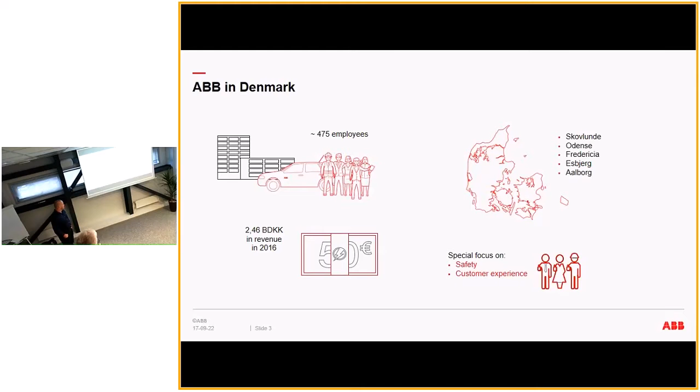We're a little bit less than 500 employees in Denmark. We're located in 5 offices. Aalborg is one up here, where Morten is from. Then Skovlunde is in the Copenhagen area, and then it's more or less on a line from east to west. We have an office here in Odense, one in Fredericia, and one in Esbjerg. Esbjerg takes care of all the offshore activities in the North Sea from oil and gas. We have a very high focus on safety and customer experience.

We work in different areas. So we have the product, which is most of what we do. We do systems. And then we have service and software. This one is almost 60%, and this one is 25 more or less, and the rest is services and software.

Hey. Hi. Yeah, it's good that you're English, sorry? Are we not Icelandic? I think the people are waiting outside. They're waiting outside? But it's 11 o'clock, isn't it? Yeah, but should they? I didn't know you were there. Okay, I'll give it. So we got it.

And we work in these 3 main areas: utilities, which is more like 1/3, industry, that's a little bit more than 1/3, and transportation and infrastructure. For food and beverage, it's primarily in the industry segment.

And we're all over the world. It's more or less Middle East, East and Africa, Asia and Africa is 1/3, North and South is another 1/3, and Europe is another 1/3. So we have a lot of colleagues.

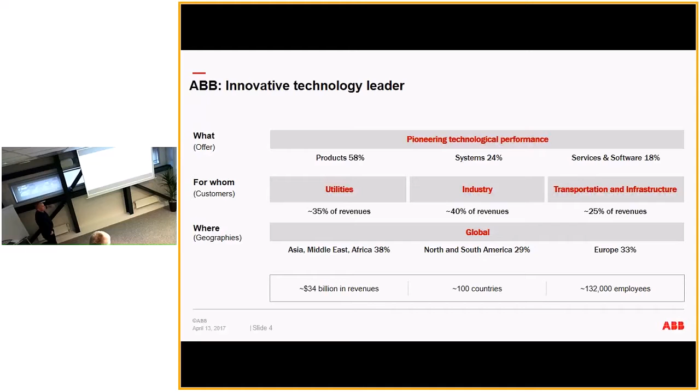Actually, this number is not correct anymore because we acquired a company 2 months ago, so it's 145 now. So we have to be very careful when we send emails to all of you. I tried it once, and I don't know how many thousands I got on holiday or whatever, so don't do that. We represent around 100 countries around the globe.

If we look at what we're serving, we do a lot in buildings, a lot of building automation, in transport and infrastructure, the charger stuff for the one that we had in the room before, shore-to-ship. In industry, we do almost anything, and in the energy supply and transportation of energy, storage of energy, creation of energy. Anything that has anything to do with automation or power, that's basically what we do.

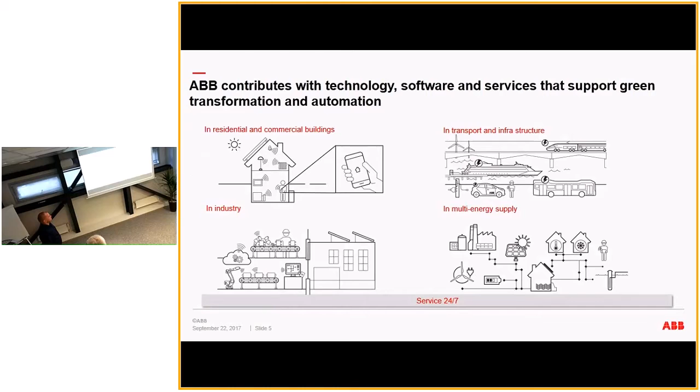So, looking at food and beverage specifically - what we do are solutions, and basically in food and beverage we have both solutions and specific products. Morten will come back to some of the products we have in the product line specifically for food. Basically, what we work on is improving food and employee safety, product quality, helping you lower your TCO, and we address the industry trends now and in the future.

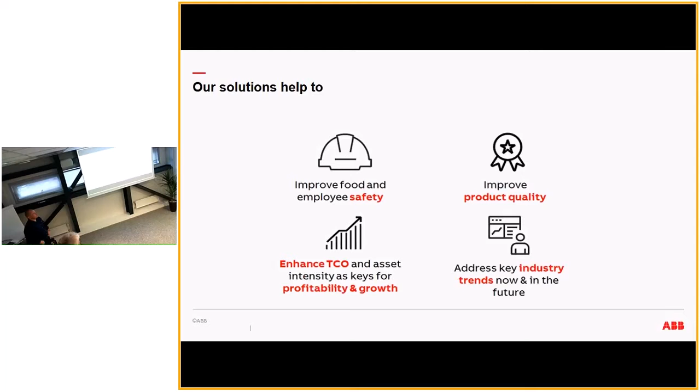That's basically how we work in this area, actually the same way we work in most of the areas we work in. If we look at what we deliver, this should be like a typical industry, in this case food industry. It's everything from generation of energy, from wind turbines or solar panels, to how you distribute your energy, how you operate your plant in the operator room. If you have robots in your palletizing line, for example, process control for whatever process you might run, no matter what, we can help - we have products and solutions for all of this.

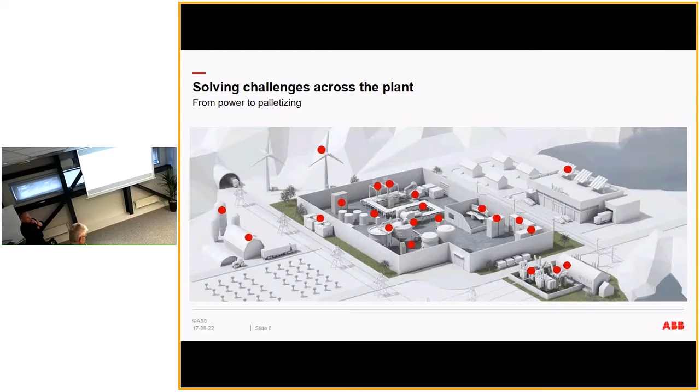Basically what we do on top of all this, we put in what we call MES systems - software systems to keep track of all your production, typically to improve quality and reduce waste. To have full traceability in food is very important, to have traceability of what you produce. So it reduces inventory cost and increases asset utilization to get more through your factory. All this is addressed in the system we call MES - basically, it's a production system to run the factory.

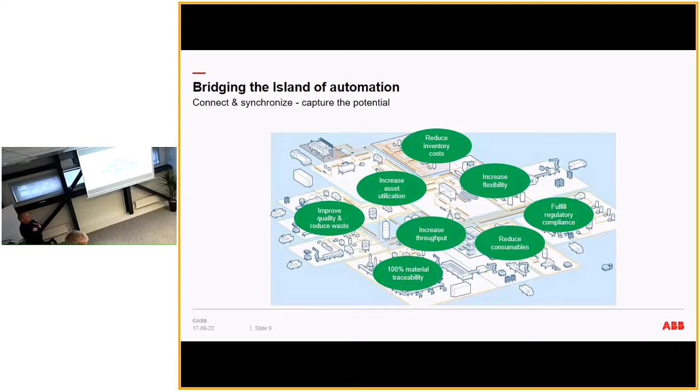From a control point of view, we have the control system to control your plant, which is fully automated. PLCs in many different shapes, sizes, and colors. The reason why these guys are yellow is the safety PLCs, so you can use it for safety systems as well.

We might have all the electrical installations and distribution of electricity. We do have a specific instrumentation program called hygienic master, so everything is stainless - specifically for the food industry as well. Then power distribution, and up here we have the mechanical, the bearings and the motors - we'll talk more about this area at the end. So that's kind of the palette we can deliver in this area.

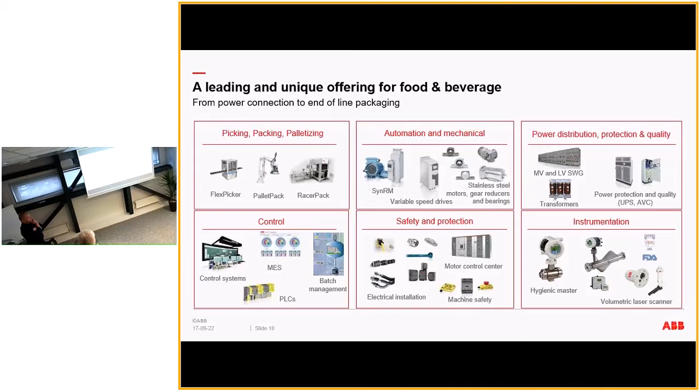This one is a kind of new one, we actually have a copy here. This is what we call a smart sensor that you have the ability to put on a motor. It has a special way of connecting - very easy to connect to an old motor or new motor, it doesn't matter. It's wireless, so it starts measuring the vibration of the motor, the current consumption, and the temperature.

Then you get a lot of analysis inside this device itself, and you can use your cell phone to get a traffic light - green, yellow, red - if the motor is okay. When you connect it, as soon as your phone is close to it, it will take the data and send it to a cloud service as well, where you can do more analysis. So it's a fairly cheap way of doing energy control of your motors, or checking the bearings. You can get a lot of info out of this device.

And again, it's wireless with a battery included. It will last 3-4 years, and then you replace it. So that's the newest one.

It's on the market right now and can be ordered. We already have a lot of customers using it because it tells a lot about your production. If you have whatever on the end of the motor, it will actually tell you a bit about that too - if the current increases, for example, that signals some problem. You can see the life length and get predictions on when you need to service the motor or switch it to another one.

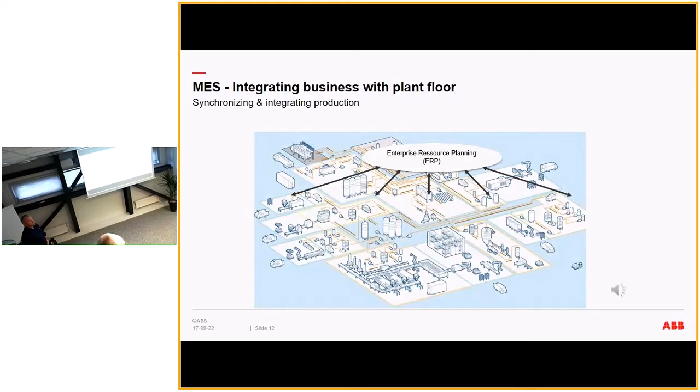This one is more about how to run your plant, where we have software to connect all these different parts of the factory. From warehouse - we normally call it from bay to bay - you get the raw material and end up with your product. Then you use this MES to synchronize all this different stuff, interfacing to all these different subsystems.

It might be a warehouse system, it might be scales, it might be a PLC SCADA system, or you have a historian, and you might have a LIMS system or quality management system. In order to get a production flow across all this, you need some kind of tool to connect all these individual software packages together, and that's basically what we deliver in this MES system.

You connect to the ERP where you're planning the production, and then you execute the production using the software. The reason why it's a really good idea to do this in food is that you get full traceability - when have you done what to the product. So that's a crucial part.

We also have a module in here called OEE, overall equipment effectiveness. So you can measure if you utilize your machinery enough, to get a lot of info back. That's all part of the MES.

We install it in all our motor factories - we have this system installed - and we have a few installations in food as well. There's one in Switzerland where they produce chocolate powder. And we have a similar system at a Danish slaughterhouse, actually the biggest one in Europe.

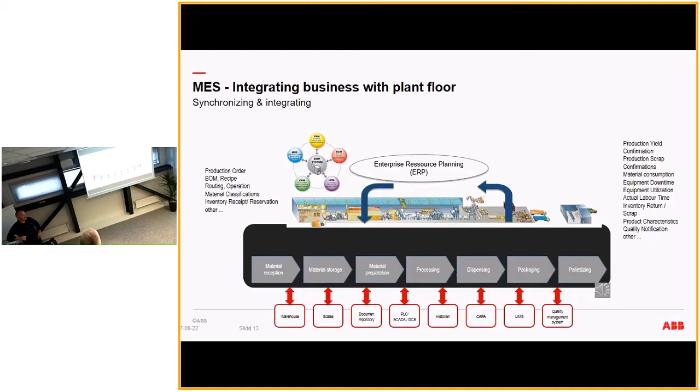This one is another way of showing it. So again, it's a lot of different subsystems connected into one, so you have a full production flow of your factory.

There's a lot of weigh and dispense, and it depends on the industry. Normally you have these weighing points where you have to manually add something to your product. You might have the inventory, you might have the warehouse. It could show the OEE, the effectiveness right now of the complete line or on a special machine - so it could be per machine, per line, or per factory. So a lot of software to connect all this together.

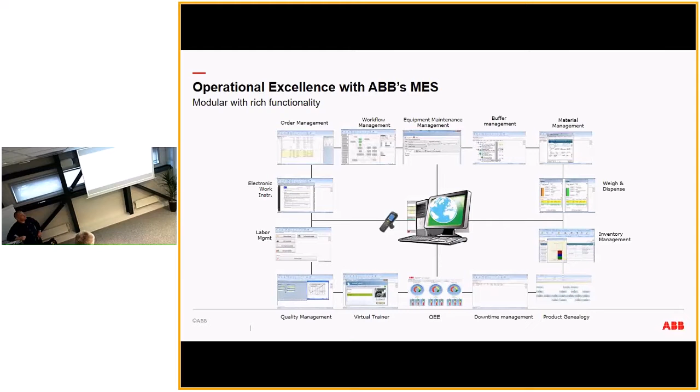In order to get a route from this tank to that one, it can actually be a little bit complicated. You might run a cleaning from this one to that one, and then you don't want to mix the cleaning and the product. So this one is actually fairly complex - it looks very simple, but it's actually very complex.

So we have some software packages on the automation level to take care of the routing between all these, so you get the optimal routing and you're sure you never run your product through an uncleaned pipe, for example. It will automatically say, okay, you need to do a cleaning before you can run your product. But again, it's typical in dairies or other industries where they have fluids.

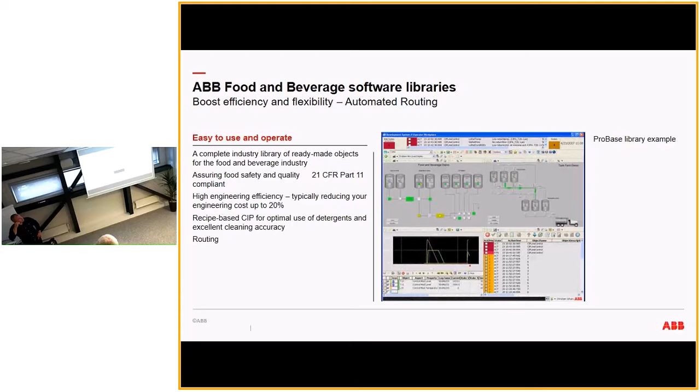This one is our system for controlling the plant - we have a fully automated plant. It's called Ability 800XA, and then you can run what we call the batch management, which is basically to run the individual batches in your factory. It will automate all the equipment - open all the motors, valves, stirrers, whatever - and it's controlled by what we call a batch manager.

And again, for traceability, you have a full picture of what was done when, and if there's any operator interactions, it's logged in the database as well - you get a full picture.

For example, in pharmaceutical, they have this agency from the U.S. called the FDA - Food and Drug Administration. There are pretty strong rules on what you have to do, especially in pharma, but we see it more and more in food as well. So more and more regulations are coming to the food industry, and we're trying to cope with these regulations in this automation system.

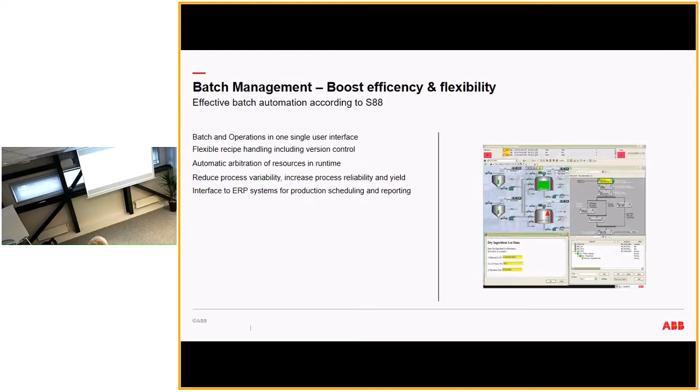So this one is another way to look at it - a fully automated system. We have the workplaces where the operator controls the plant, then all the controllers, and connection to all different equipment down here. It could be power automation, it could be anything, down to the flow meters and so on. We might include safety if it's a critical operation, and PLCs connecting to the robots. So everything is integrated into one system and controlled by one system. That's on the automation level.

And then the next level is the MES level, as I had in previous slides, how to control your production. So this one is to control your process, and the MES system is to control your production. Sometimes it's called vertical integration - horizontal integration is the process, and vertical is how we run the plant.

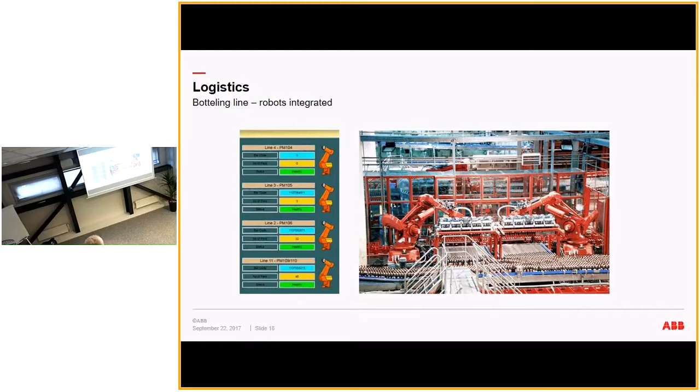This one is another example where we use our robots for picking and palleting. There's some specific software to control the robots, but again, the robots can be integrated to the rest, so you have a fully automated system.

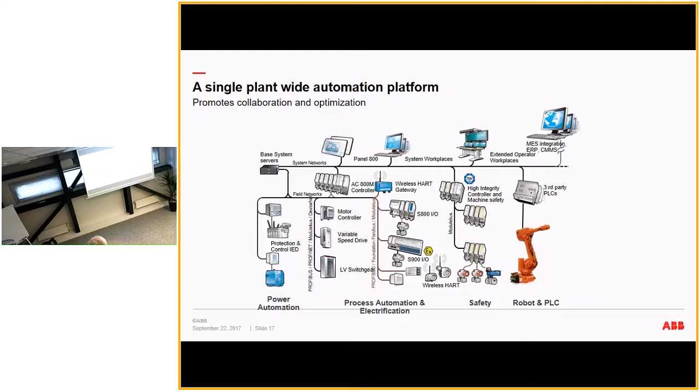Yeah, we have chosen 3 kinds of products just to show for the food and beverage industry. We have chosen a specific stainless steel motor and some bearings, which have some great features for the food and beverage industry, and a gearbox, which is also a stainless steel gearbox.

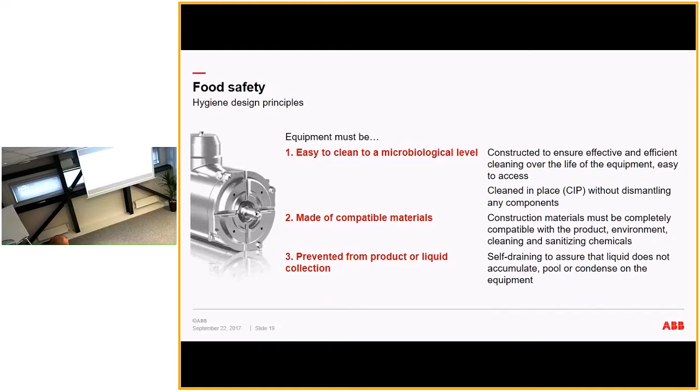Why do you need to choose a wash down or stainless steel motor? It's not that new, but this year ABB developed a new IE3 wash down stainless steel gear motor, IP69K, which means that you are allowed to clean it with high pressure. When we go further, you'll see why you are allowed to do that - it's because of how we built the motor.

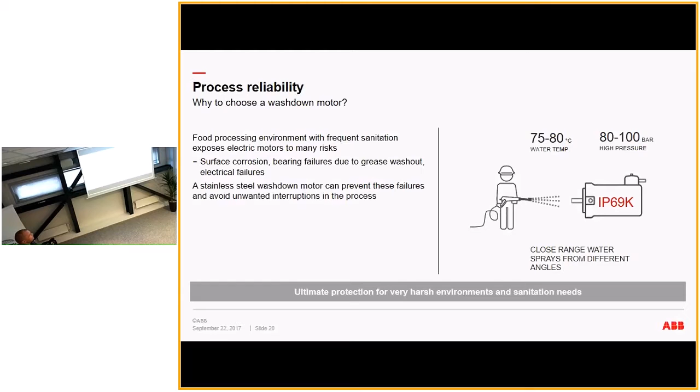And actually also with hot water - so it's quite nice. We have a few places in Denmark where we have this motor running, and they are very satisfied with especially the surface, how smooth it is, how easy it is to clean. So yeah, that's one of the main reasons to choose a stainless steel motor for production in the food and beverage industry.

As Per mentioned, food safety is very important for all the products, and of course for the people who own the production. So therefore, it's very important for us to develop products which align with all the regulations and the requirements in the food industry.

Actually, I know in Iceland the energy is cheap, very cheap, but in the rest of Europe they are quite interested in this one, IE5. Right now we have it in IE3. We have of course the wash down with high hygienic food zone, and we have another one here - we also sell for the food and beverage industry in Denmark. This is a non-painted motor with a coating. Some places you may know, but it's not necessarily a stainless steel motor - you still have the benefits of a ventilated or normal standard motor, which can be very interesting in some places to just have a non-painted motor, but still meets the regulations. And of course we have the standard motor series.

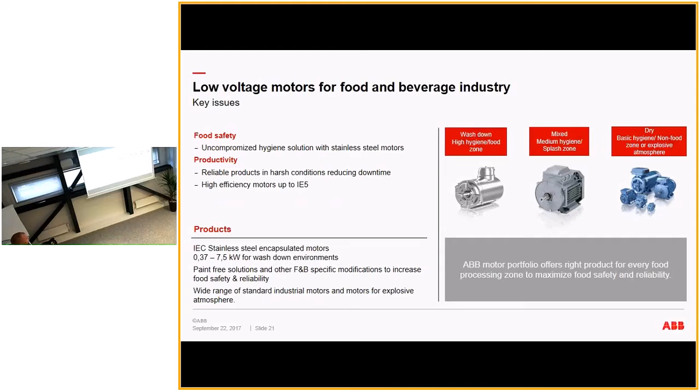Here's the reason why we developed a brand new stainless steel motor - we are one of the few with, especially, encapsulated winding. You see the winding is encapsulated, so if water gets inside the motor, you're actually still able to run the motor. This is because the motor is also designed with drain holes.

But of course there should not be water in the motor, but yeah, maintenance is very important over time. The production manager wants it to be easy to maintain the motor if something should damage it. So it's a very important thing, and the sealing part here keeps the water out, or keeps wear out of the motor. It's also quite a good solution we have here.

And of course, the grease inside the bearings is for food and beverage, and that's standard for the stainless steel motors. We have it actually by the end of this year - we have it on stock in Minden, Germany, in all kinds of buildings - B14, B5, B3. Hertz is the same, and ambient temperature.

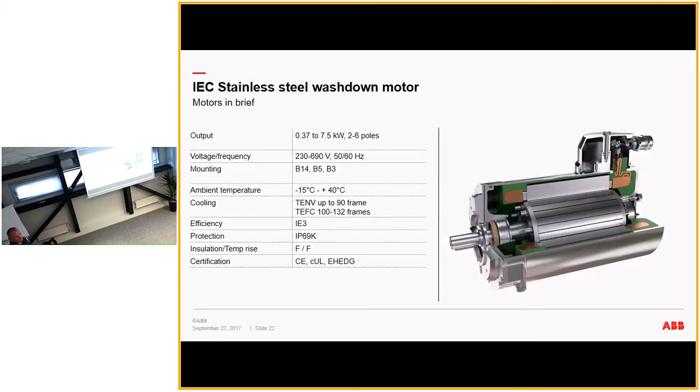So that's actually what I just told you, but he has highlighted the main reasons why you need to choose a stainless steel motor. But I'll say that the three things I mentioned before, that's the main reason.

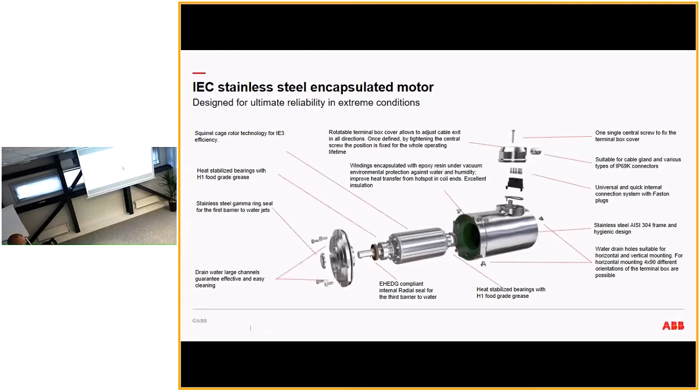Here he says that it's without any ventilator. You can also have it with a ventilator if that's necessary, if you want that. But I believe in dairy, in slaughtery, anywhere, they prefer without ventilation.

One of the reasons why we developed an IE3 and actually also an IE5, that's because of the lower surface temperature.

We have a slaughtery - Per mentioned the big slaughtery in Horsens, in the south part of Denmark. We also have a Germany-owned slaughtery where I live, up north, and they also slaughter pigs, a hell of a lot of pigs there.

For one of the lines where they're removing the hair from the skin, they have more or less hundreds of motors on each side - it's around 200 motors, stainless steel, our stainless steel motor with our stainless steel gearboxes, and they are very impressed by how easy it is to clean because of the low surface temperature.

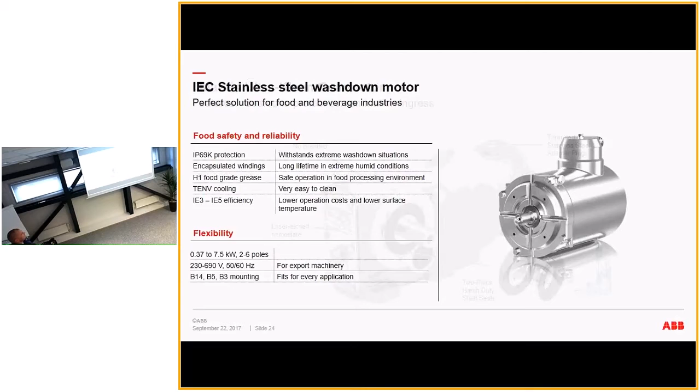I mentioned the gearbox - it is also a little bit bigger than the competitors. That's also because of the temperature and how to remove the temperature from the gearbox.

So the maintenance is kept to a minimum. Therefore, the stainless steel gearbox is a little bit bigger than the competitors, but it's much more stronger actually. We have made some tests in a few places in Denmark where we compete against SEW.

But again, it's to keep the surface temperature down. That's very important in the food and beverage industry, because the heat in stainless steel will build up and build up and build up. It'll get very hot, the surface temperature, when you run a stainless steel motor or a stainless steel gearbox.

And of course, this sealing is also quite good. It's quite good to keep out the water. And another thing I'll mention is how you mount it and demount it.

I'm used to work in a workshop for 12 years, so I know pretty much how to demount and mount a motor. The way they do it, it has a bushing system inside this, and this is how you go through and screw and tighten the bushing system, and that's quite nice. It's very easy to demount and make maintenance on those gearboxes, because one of the biggest issues when you have a normal gearbox with a hollow shaft is it's sometimes very tough to remove the motor if that's the problem in maintenance. But yeah, it's a quite good gearbox, and it's strong. It's definitely strong.

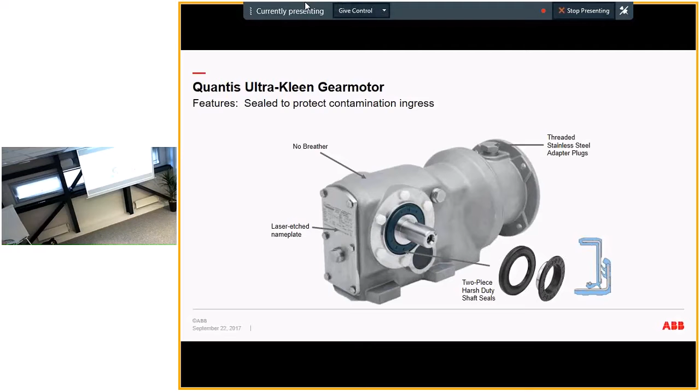Just to show you, we have of course the stainless steel series. We have also this one, the EZ Kleen, we call it. That's also a coating, and it is for the food and beverage industry, but not the critical types. This is definitely the critical one, and then we have our standard series. Of course, all the things are made in the US. It's called Dodge mechanical components.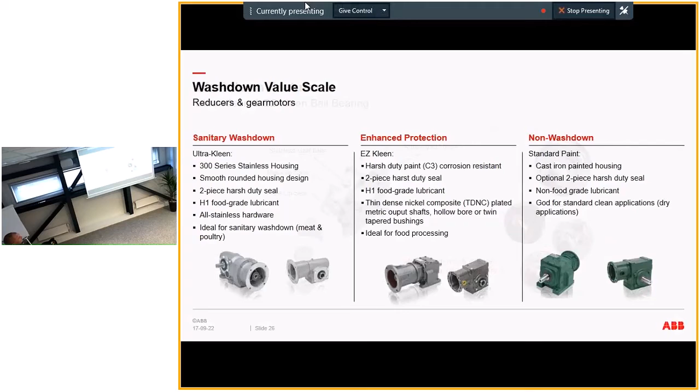And the last product I'll tell a little bit about is the Dodge bearings. It's the EZ Kleen. I've just shown this picture, but you can have it in whatever mounting arrangement—a flange with 4 holes, 2 holes, any kind. This is just a picture to show what's the feature with this product.

It's polymer. We also have it in stainless steel, but actually the customers in Denmark, or I mean all over Europe, prefer polymer, which has great benefits because it's easy to clean.

And of course there's stainless steel bolts, and this one is actually one of the main reasons why to choose a Dodge bearing or mounted bearing. It's the cage here. It's a quite unique system to keep the grease inside the balls when it's running, and it does have a patent on this system, and it of course keeps the friction down and keeps the heat away because of the film you have on the balls all the time because of this cage system.

And the last thing I'll mention is the triple seal, which is also a patented solution from Dodge, of course, to keep the water and all the wear outside the bearings. It is a quite good product.

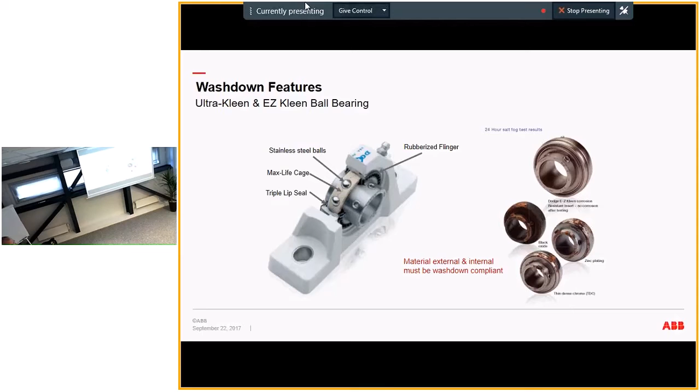And the last thing I'll mention about this product is the housing. A lot of our competitors do this housing design, but it's solid—it has a solid surface. So that's also a quite good reason to choose this product in the food and beverage industry, where cleaning is a big issue.

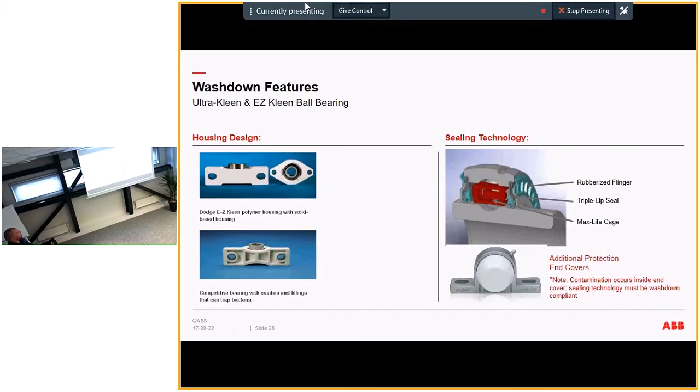As I said before, we have it in all kinds of mounting arrangements. This is just a normal standard 2-hole pillow block mounted bearing, but you have it in any kind of mounting arrangement. This is just to show that they have all kinds of bearings, also normal bearings, non-wash down for standard applications, but that's not what we're talking about today.

So those two, I'll say, are interesting for the food and beverage industry. This Dodge company has made these for, I believe, I can't remember how many years. It's a quite old company and a quite big company, and it is the biggest in the US and in Canada for bearings.

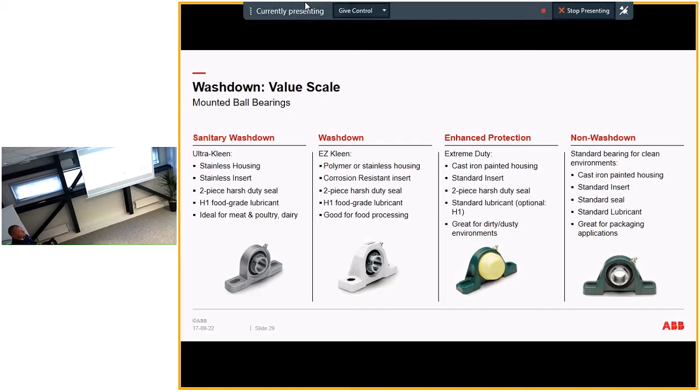And last, I would say ABB is a trusted brand. So of course, we are a leading provider in digitalization, automation, and robotics. And of course, we constantly invent and invest in new technologies, a driving force in the industrial revolution with over 40 years experience.

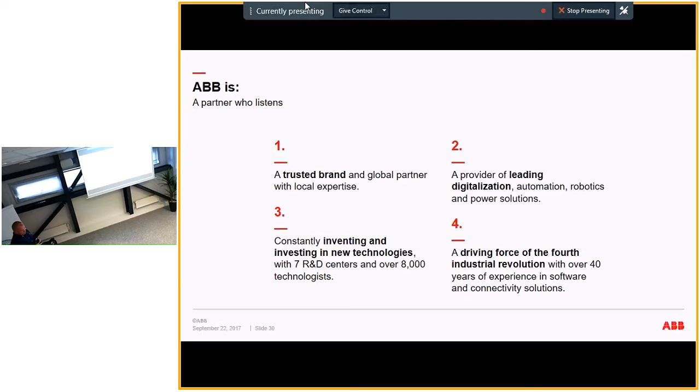So, Larsen, if you have any questions, feel free. Any question?

I just chose those 3 products because that's mainly for food and beverages. I know for sure we have frequency converters, standard motors. We have, as Pierre mentioned and showed you before, the whole package for you.

In the meantime, I was actually trying to connect this one, but it wouldn't let me connect it because it's not mounted to a motor. It has to be active when you pair it with the phone. There's a QR code here, so when you put it on, you take a picture of it, and then it will guide you through how to register it. But it has to be on the motor before you do it. I tried to do it here, but it didn't work.

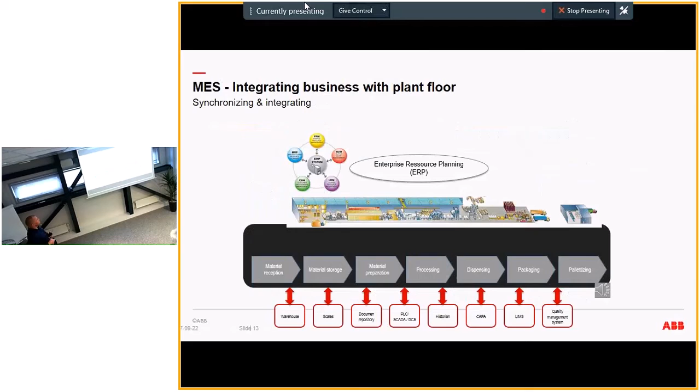How does it work? Does it connect to the motor? Yeah, actually what you do is put a piece of iron in one of the ribs on the motor. Then you use this Loctite, it's called, and basically you lock it with that, then you have a nut, and you screw it on here with the two.

And you can see from the analysis of the vibrations which of the bearings are getting older. If the fan is dirty, all that is done by the analysis of the vibrations, and you will see it on the phone. That's why I tried to connect it. And you will see it immediately. If it's yellow, it's because you're getting closer to some problem. So the key point is that there's no wiring, you just clamp it on.

Because for other motors, especially larger motors, we have a lot of vibration equipment already, but it has to be wired. So we are constantly going over the plant with the vibration checks, for the pumps and motors. And that's exactly what this one should avoid. Right now you have to use your cell phone to get the data to the cloud system where you can actually monitor it from the outside.

But we'll soon release what we call a gateway. So if you have a lot of motors in a secluded space, then you have a gateway and it will connect to the cloud. This one runs on Bluetooth, so it's around 10 meters, you have to be close to it. So right now you still have to do your rounds in order to get the data, but basically you just walk by and then you get all the data.